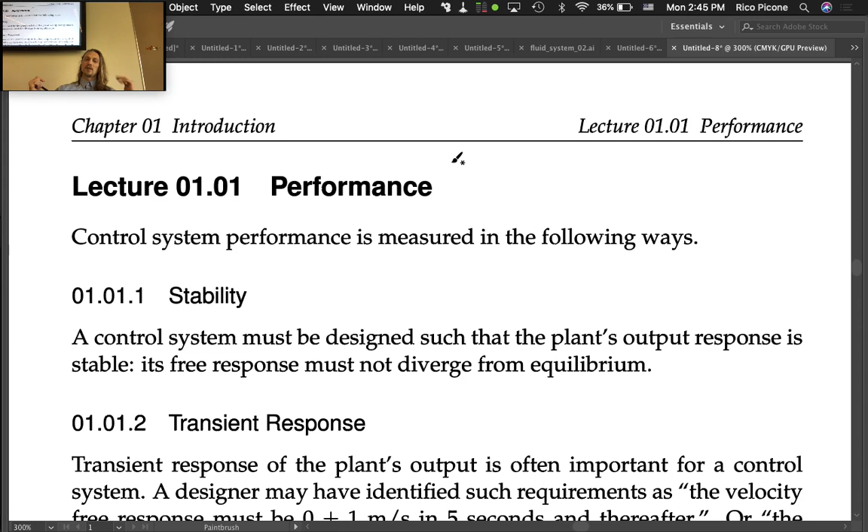And bounded input, bounded output stability is another one that is considered in controller design. They're not equivalent, but they're very related concepts. So we'll focus on what's called asymptotic stability, which is the free response based one: initial condition, let it go and see if it goes back to equilibrium, which is the more common one to consider. Bounded input, bounded output has very specific use cases; especially when there's resonance involved, it can be very important to do bounded input, bounded output analysis.

So transient response is the second performance criterion we'll consider. Transient response of the plant's output is often important for a control system.

A designer may have identified such requirements as: the velocity free response must be 0 plus or minus 1 meter per second in 5 seconds and thereafter. That might be something the designer came up with as a requirement based on whatever the system was supposed to do. Another example would be: the pressure step response must not overshoot its final value. These sorts of requirements are common.

As with many design techniques, some iteration is usually needed in order to meet all of the requirements. So this would be, for transient response, how does it go from its initial condition to some steady state? Does it do that in a way that I like? Does it do it fast enough? Does it stay close enough to the final bound in a certain amount of time? Does it overshoot and oscillate? Maybe that matters to us, maybe it doesn't.

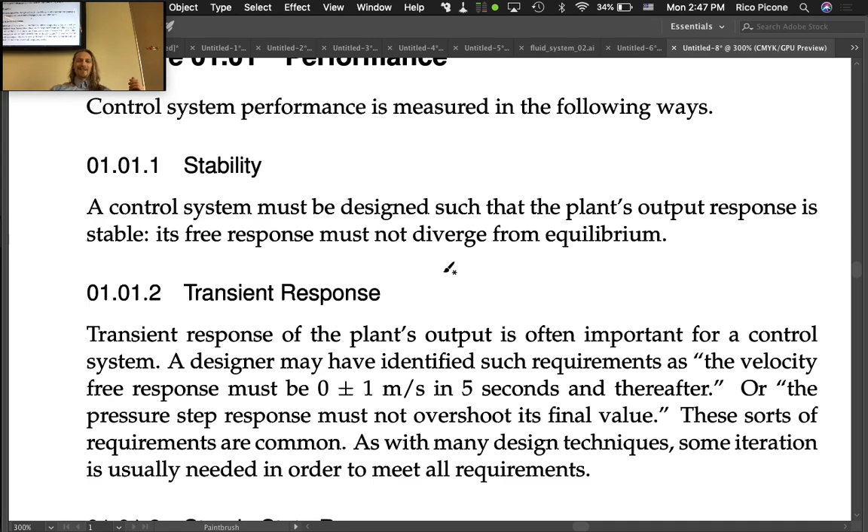So if it's like a human factor situation, like what are the G forces that the person experiences when this response happens? There might be many considerations in that transient response. Steady state response is the next one. Steady state response of the plant's output is another important consideration of the control system. After the transient response has decayed, the steady state response must meet certain criteria, such as the position steady state response to a unit ramp function must be within 5 millimeters of the desired position.

So as we'll find, oftentimes we can't get perfectly zero error in steady state, okay? Well, we can, but we have to change the way our controller works if we're going to do that. So oftentimes what we'll do as our design criteria will be, okay, you just need to be within a certain margin, like a certain tolerance. You could think of it as being a certain tolerance on error in the steady state. And so that brings up a whole slew of considerations as well.

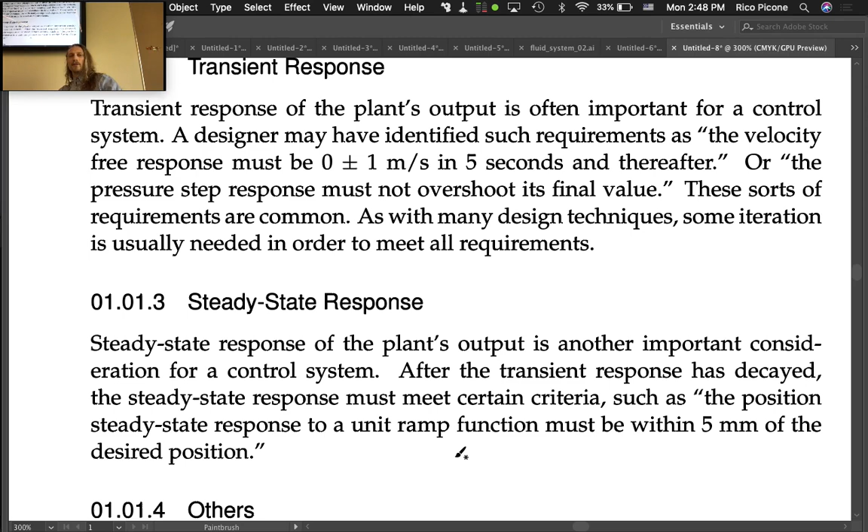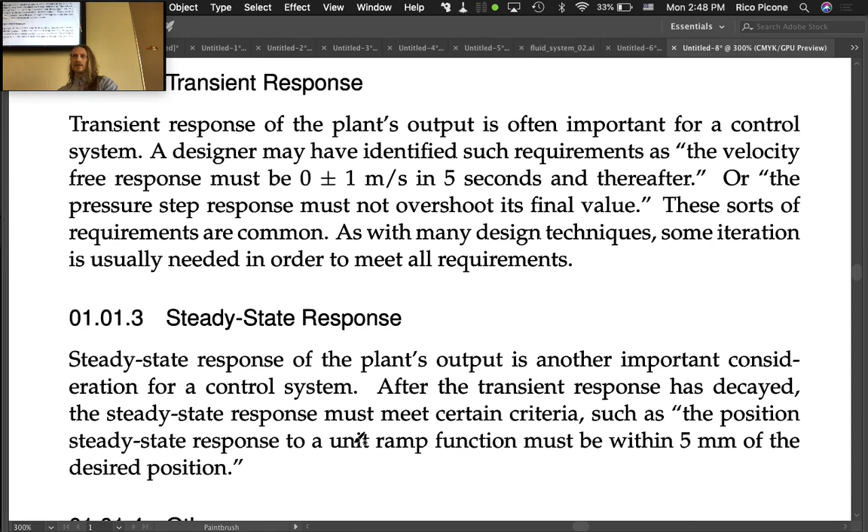So these are the three that we're going to focus on: stability, transient response, and steady state response. And they're very technical, and they require a good understanding of system dynamics in order to understand how to design for these. But there are others, too, that we're not going to consider very much in this course. So cost is always a consideration in design. Weight might be a consideration. So your control system, if it's going to be on an aircraft, for instance, the weight of it's going to matter.

Complexity. So complexity is important for precisely the reason why it was hard to predict, apparently, that the 737 MAX would force the nose of the plane down and not allow the pilots to regain control of it when a certain sensor went bad. I mean, that seems to be at least a reason that contributed to those going down. And when you get a very complex system, the number of possible states of the system becomes so large that, in the finite time that you have to design something, you can't even simulate all the possible states of the system. And it's very hard to guarantee you won't get into some bad state.

So that's probably the main reason why we prefer simpler controller designs and simpler system design in general, because it's really hard to predict what's going to happen in complex systems. And even if you feel really confident that you've done a great job, there are some situations that sometimes elude us, and they can cause problems. And especially if it's a critical situation where there's human life involved, then you really need to be cautious about the complexity of your system. So that's another factor.